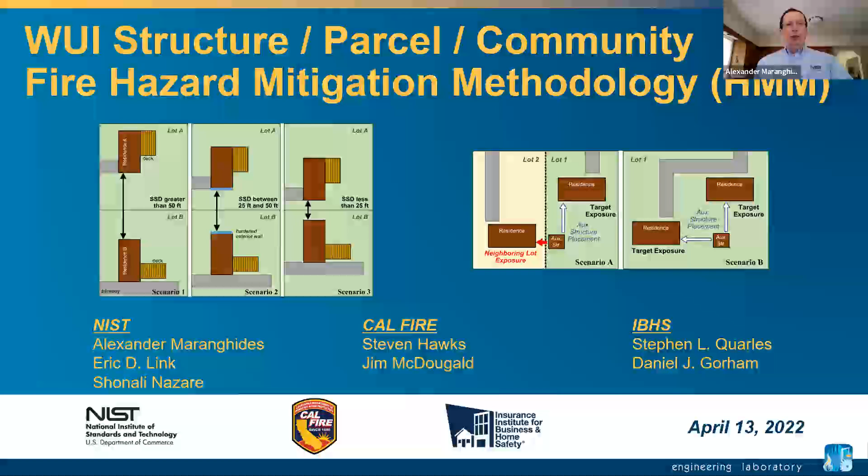So we're going to talk about structure separation distances and how we are using this concept to refine the WUI definitions at large, which are looking at the problem much more macroscopically at the national or even regional level. You're going to hear that fire and embers are very different, provide very different hazards, and how they're different spatially, temporally, and also what to do about them.

You're going to hear specifically that we're going to require hardening for embers, and that the fuel spacing is going to drive how much hardening will be necessary for fire.

Quick disclaimer: when we use the term 'required,' this is within quotes. Really, throughout this presentation, when we say must, require, shall, or should, this language is not code language. It is really to convey a point of critical technical importance that a specific action needs to be taken if we want to reduce ignition of structures and significant losses within the community.

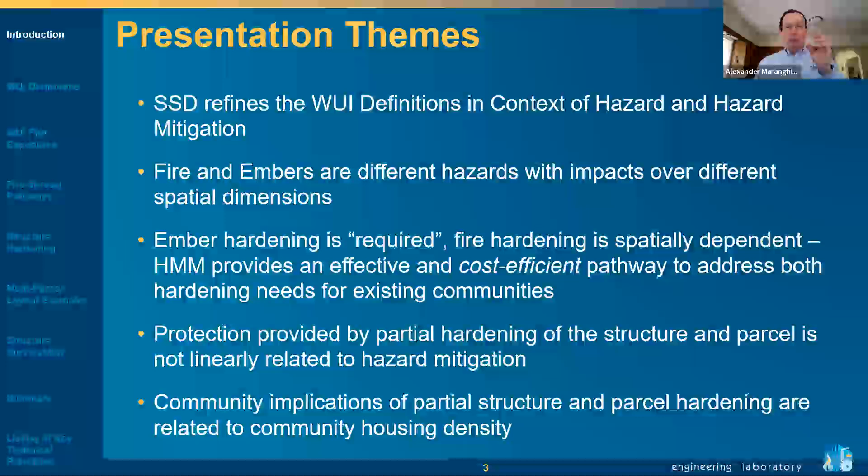So these are themes that I want you to keep in mind throughout the presentation. So let's talk now about hardening and hazard mitigation specifically.

When we look at hazard mitigation, we cannot think of hazard mitigation in the absence of exposure. It'd be like trying to build a building to resist a hurricane without knowing what wind intensity you want to design the building to withstand. It's exactly the same thing with fire and embers.

So when we're talking about hardening a structure, a parcel, or a community, we have to think of the hardening knob and also think of the exposure knob. And what we want is to get in the sweet spot — we want to reduce the exposure and harden the structure and get to the point where the structure doesn't ignite.

We don't want to over design, but that is obviously a safer approach. We certainly don't want to under design. So it's really the balance between those dials. We have to really understand this every time we talk about a mitigation at the parcel, and every time we talk about a mitigation at the structure, we have to be asking ourselves exactly what are we trying to defend against. This is really the driver, the technical driver that stitches this whole methodology together, this understanding of the hardening and the exposure.

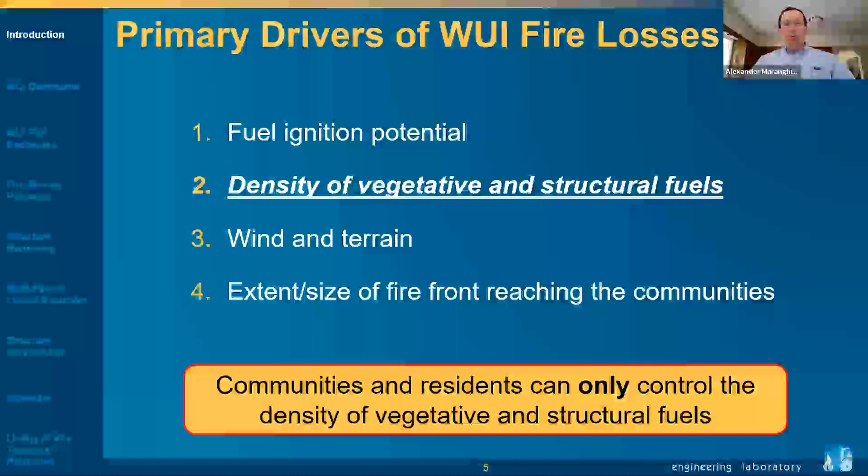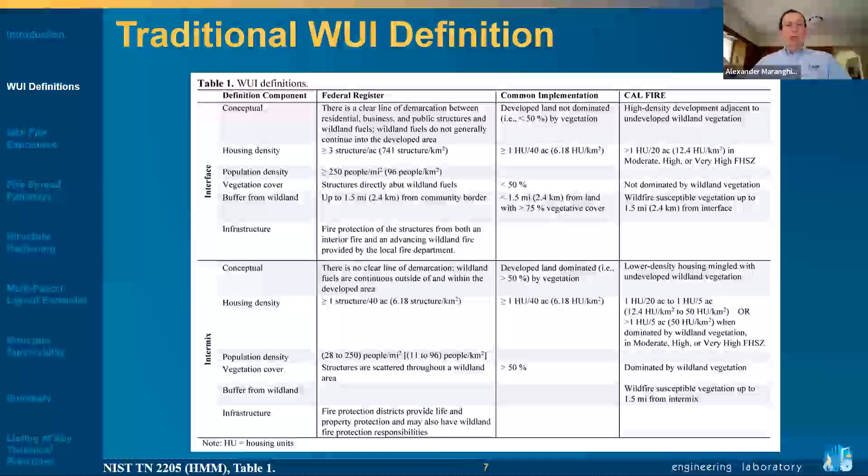I'm not going to dive into all of the details of the federal definition, common implementation, and specifically in California, how CAL FIRE has chosen to apply some of these federal register definitions. What I do want to say, though, is that these definitions were intended to provide a snapshot at the country level across the US, and added significant value to help us understand where WUI is.

There are significant limitations behind these definitions, and we'll talk about a couple of them right here. One is that it's quite coarse, and it's understandable that definitions are coarse because we are looking at landscape scales, using LANDFIRE data in many cases, coarse information. The second part is, by default, because we're defining it, we're constraining it, and what this does is it creates, in many cases, arbitrary lines where on one side of the street we are in WUI, and on the other side of the street we're not.

And that can cause problems, an example of which is the losses at Coffey Park in Santa Rosa, where that community is almost a mile, 0.9 miles away from the furthest reach of the WUI definitions. So we like to think of, as we move forward, large outdoor fire risk areas, not necessarily just WUI, because we are seeing that these definitions can really restrict our implementation, our decision-making process. So we wanted to use this as a baseline, but really expand.

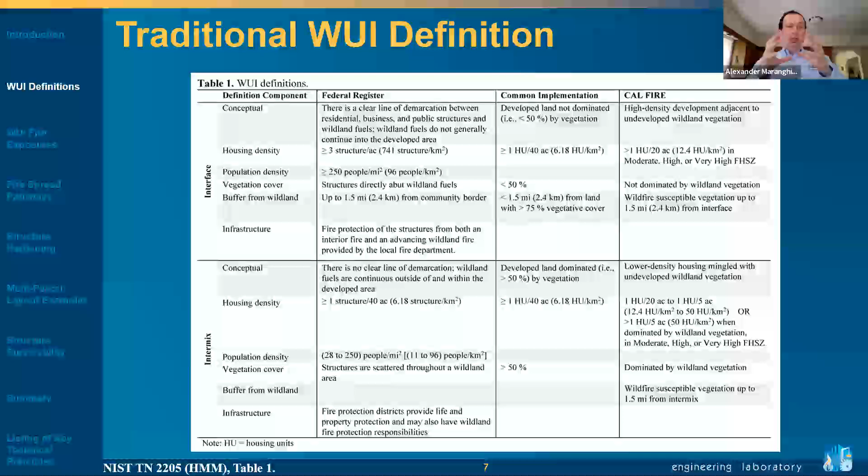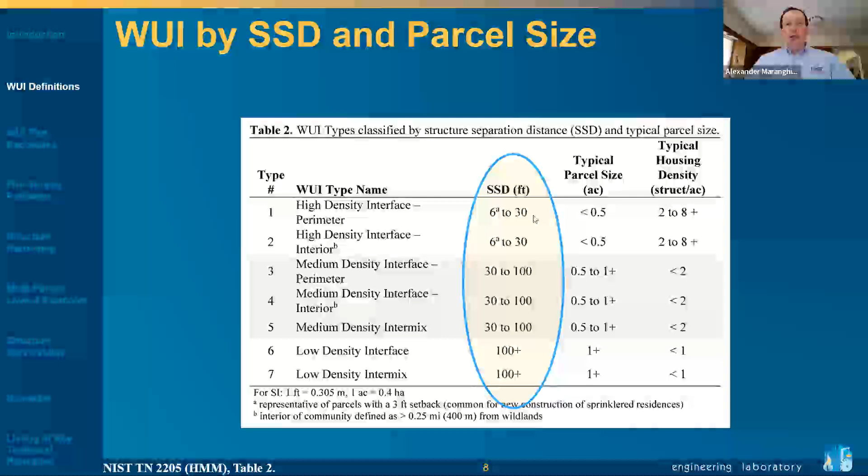So we wanted to introduce that concept and look at typical parcel size, and these are not absolutes. The SSDs, the binning of SSDs, definitely provide a high-level perspective. When we look at a community, we can say okay, we're in a type 1 or type 2 community, but that's not sufficient. We have to do the analysis at the structure and parcel level. Later in the presentation, you'll see why you cannot just use parcel size and why you cannot just use SSD. It's really the spatial layout at the parcel and within parcels that drives, or should drive, in the case of HMM, our mitigation strategy.

So this is an example of a type 2 WUI. Here we have SSD, structure separation distances, in type 2 between 6 and 30 feet.

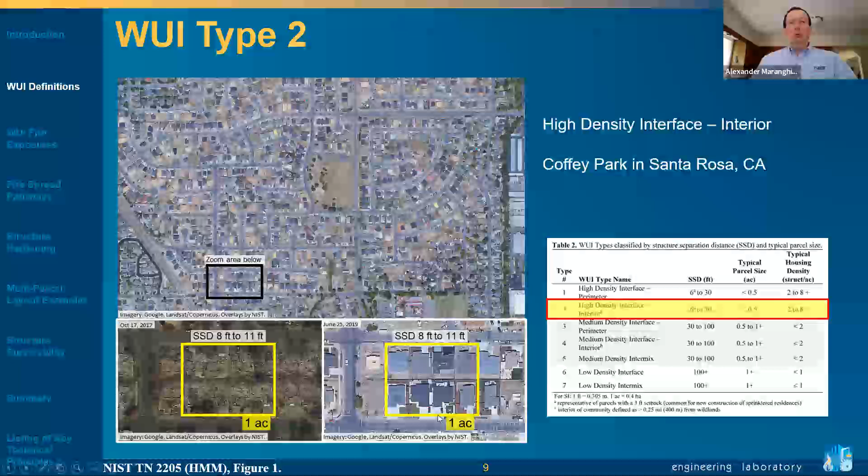If we look at Coffey Park here, this is post Tubbs, and this is pre. Right here, this is post and this is pre. We see SSDs of 8 feet to 11 feet, and we know the extent of devastation that occurred there. Just for scale, this is 1 acre, and we already see structures right there. So let's move along and look at some others.

Coffey Park is by no means an outlier, and California is by no means an outlier. We're seeing this type of structure separation distance, i.e. high density construction, all across the nation.

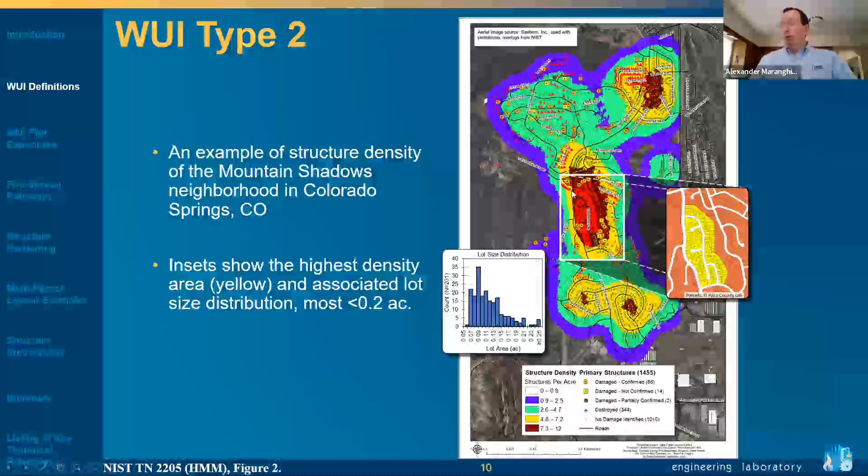This is an example from our Waldo Fire reconstruction in Colorado Springs. This is the Mountain Shadows neighborhood. Here you see these lots are nominally just a fraction under a tenth of an acre. The red indicates destruction, so very similar behavior as what we saw in Coffey Park. If we look at it a little bit more, here in less than an acre we have 1, 2, 3, 4, 5, 6, 7, 8. So it's even a little denser than what we just showed for Coffey Park.

If you look at the report, you can see the different structure separation distances and understand a little bit more about fire behavior in those different spacing regimes. But the sea of destruction here really tells us of the potential for very high losses in high density.

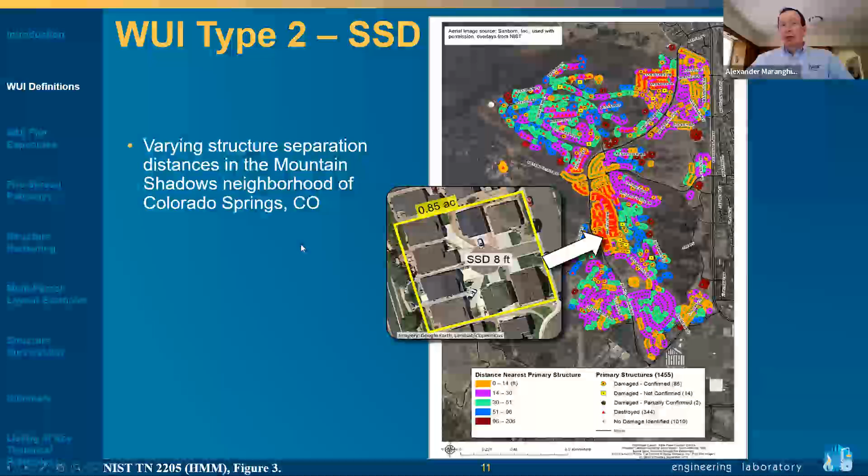Now, having said that, little spoiler alert here, you will see as we go forward that there is a path forward to really enhance the resiliency of those communities, and that's really one of the significant values added by HMM. So let's keep going here just to keep getting our bearings.

This is a type 6. This is in Rancho Santa Fe, near San Diego. Here you see significantly more room between structures. In some cases the structures are closer. We'll see this slide as well.

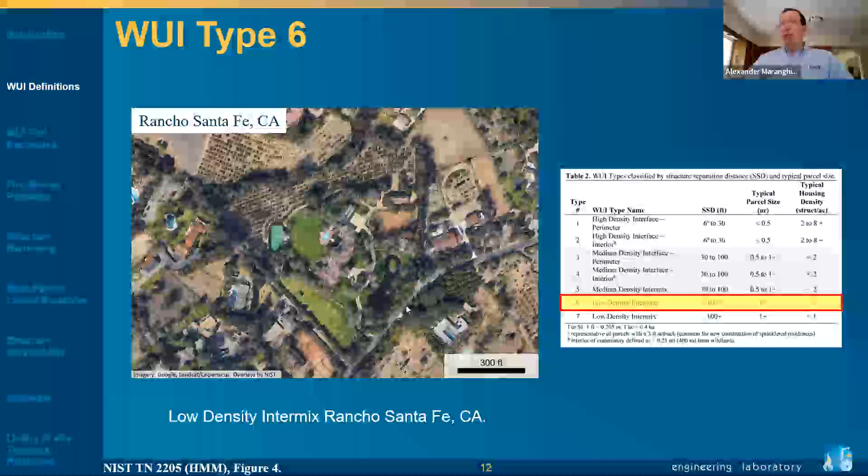So again, when we talk about a type of community, it's to provide perspective. The analysis has to be done at the structure level, and this is a clear example. This is the Trails community in Rancho Bernardo, from our Witch and Guejito fire reconstruction. Here we have two communities, or two community types: type 6 right here, and then type 5 on this side of the street with much closer structure separation distances. You could argue that even this right here could be interpreted as type 5 compared to the spacings.

A few things to point out here. When you look at these parcels, we're seeing irrigated lawns, extensive irrigated lawns, long paved driveways, i.e. non-combustible, pools, tennis courts. So in this situation there are a few areas with fuel, but I'm going to use that term loosely, landscape. Parcels are very well maintained, irrigated, trimmed, pruned, cleaned. There's a little bit of a section over here that is more of a wild habitat, and that extends in the ravine on the other side towards the valley.

So we have to keep focusing at the parcel level and understanding what we're really seeing, understanding what the structure is going to see in terms of exposures, and where these exposures are going to come from.

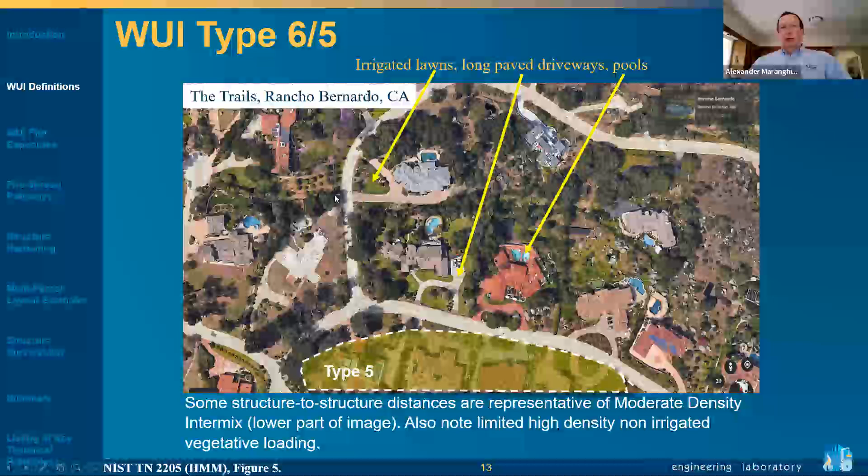Lastly, I want to show a type 7. This is low density intermix. This is Concow, and this is the zoomed in area over here, so you can see really the very low density. This imagery is taken post Camp Fire in both cases. All right, so here those structures are quite a ways apart.

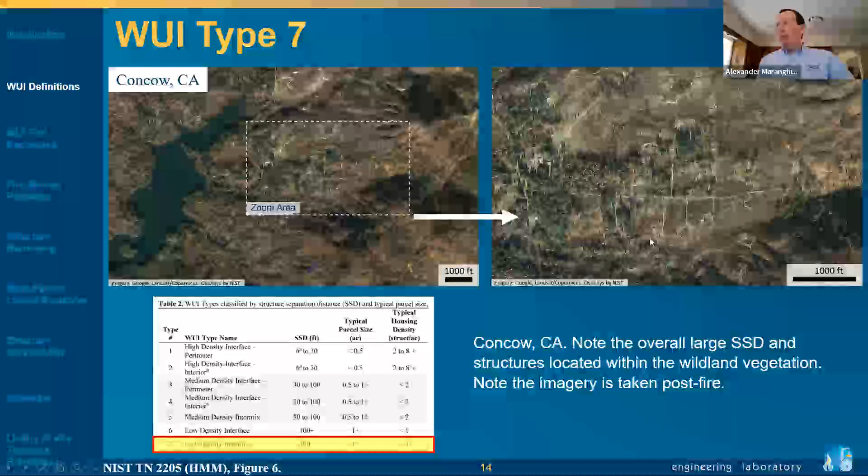And there was significant vegetation, and we can see the destruction here.

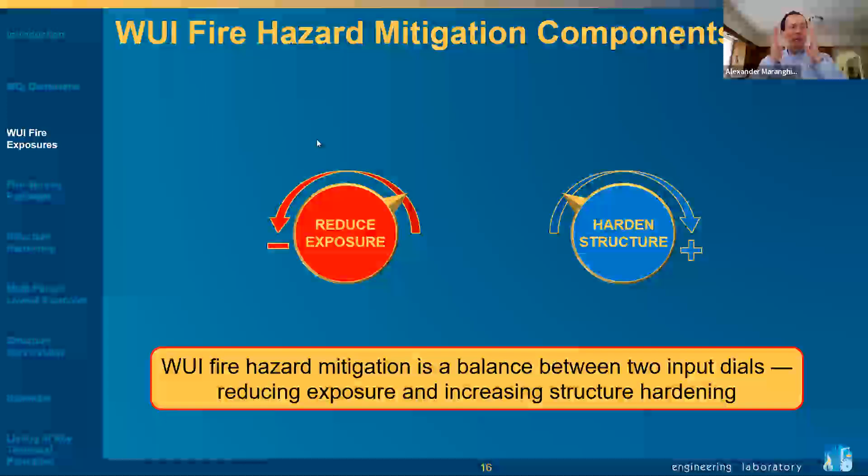All right, so let's now dive in and talk about fire and ember exposures. We mentioned this earlier, it's a balance, so let's understand a little bit more about the exposure. We're going to look at the red knob, take it apart, and look at fire and embers separately, because we have to address them separately. They're not the same thing at all.

So I'm going to start at the bottom here of the slide. We have a source here, and the source is generating fire and embers. Depending on the source, fire can be a problem intra or interparcel, depending on the intensity of the source, the location of the source within the parcel, and the sizes of the parcel.

But to bound the problem, fire is an issue we need to deal with anywhere from 0, meaning the fuel that is burning is right against the target, the residence we want to protect, nominally up to 100 feet. This upper end is not a hard number, but it provides context. In many cases within the community, we're talking about tens of feet of exposure that we have to deal with.

These fluxes can be over 100 kilowatts per meter square if you get in the flames. Durations, you can have a bush that flares up that lasts a few seconds, or you can have a structure that is burning that can burn for tens of minutes. So the exposure is quite variable.

In terms of critical ignition heat flux, we can think about 15 kilowatts per meter square. This is a rough number. Of course, it is a function of the flux, the duration, integrated with respect to what the residence or the particular material in the assembly can withstand. But at least this starts bounding the problem.

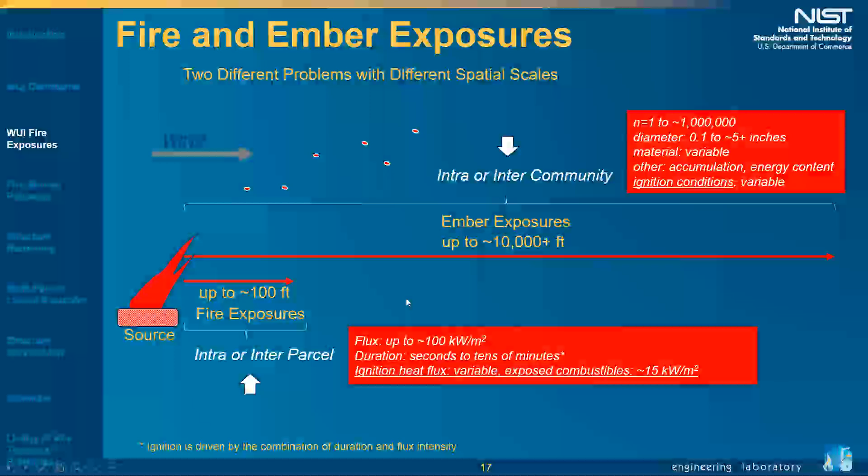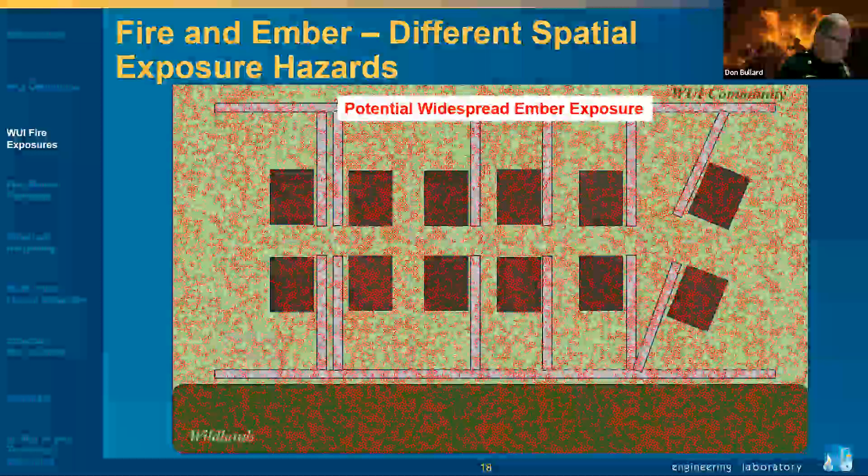Alex, can I just interrupt you for a second? I apologize - can you maybe turn off your video, because your internet is cutting in and out? Maybe if you turn off your video that might help. Perfect, I just stopped the camera. Let's see if this is any better. How is this, can you hear me okay? So far, yes, seems to be better. Okay, now... all right, yeah, okay. Thank you, Denise. So do I need to go back, or did you guys catch most of it so far? I think we're okay, Alex.

All right, okay. So this is a scenario here where the fire comes, in this case, from the wildlands at the bottom of the screen, and the community gets initially impacted by embers. There's a little animation to show how things tie together and how the fire starts progressing within the community.

So the embers come in, the front arrives, and once you have a structure ignition, now locally you have significantly higher fire exposures and a new source term for ember generation.

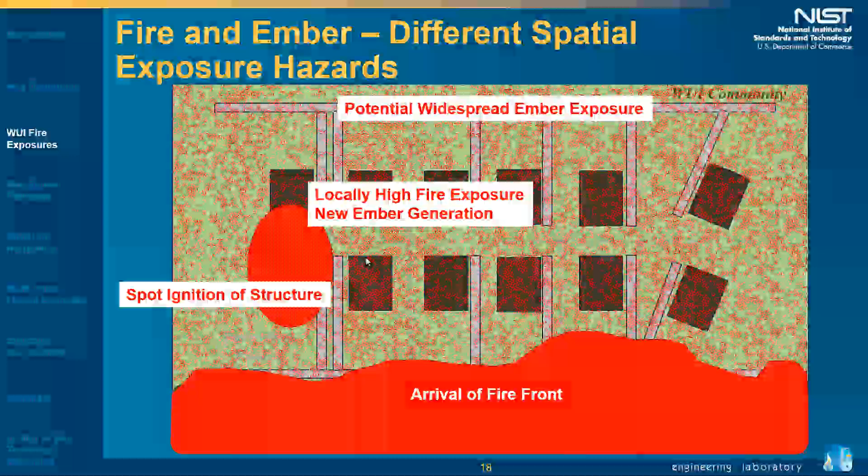You can think of it as dominoes falling, and we really want to manage those ignitions, ideally stop them. But the impact of those ignitions is going to really be a function of the community density and the structure separation density. One structure ignition in high density does not have the same impact on the community as one ignition in a community that has 2-acre lots.

Let's look at structure ignition pathways, because at the end of the day this is really what's causing the ignition. Here we have a list of, just as an example, 5 different vulnerabilities. There are many, as you know, and as we'll see in the tables that follow. Here we have fuels within the community, on the same parcel and surrounding parcels, and here the wildland fuels. In white are materials that we have already done some research on.

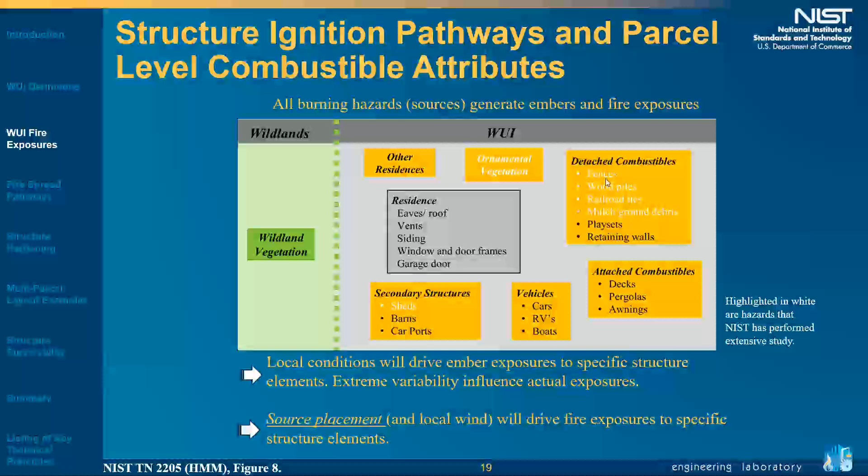So I want to look at a specific situation. As I mentioned earlier, the flames, the fire—when we talk fire, it's convection and radiation—are really driven by the spacing. The embers are going to go places. Exactly how far they go is very variable. We can have no control of that, so we're not going to focus on any of that here.

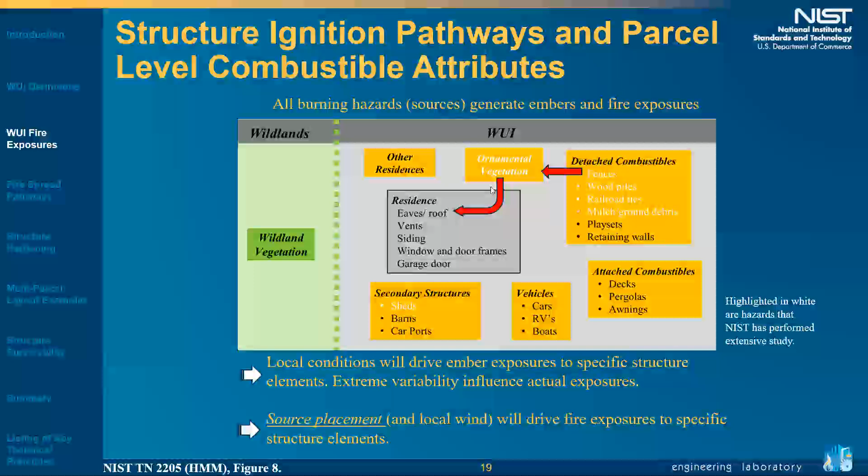So let's look at a specific scenario, from the Camp Fire. We have multiple fire ignition pathways that you can study in this technical note 2135, the Camp Fire progression timeline report. Here we have a fence to ornamental vegetation to residence, and this is the progression: combustible fence, tree, eaves, structure destroyed.

The one point I want to make here, which you will see in an example in a few slides: this residence—the owner had placed a chain link fence on their property, probably 5 to 6 feet away from their residence. So they had done what they could do. It's unclear where this tree belongs, whether on this property or that property. But the point is, these pathways really bring fire to the house, the residence, or the structure of interest, and we need to uncouple them.

And we have to think of the exposure and the hardening to make sure we get to the uncoupling. And the other point is, just from this snapshot in time, you can see the ember generation occurring, getting going over here. We have plenty of reports out there, literally of millions of embers moving through a community. This is not new. We need to deal with both of those things.

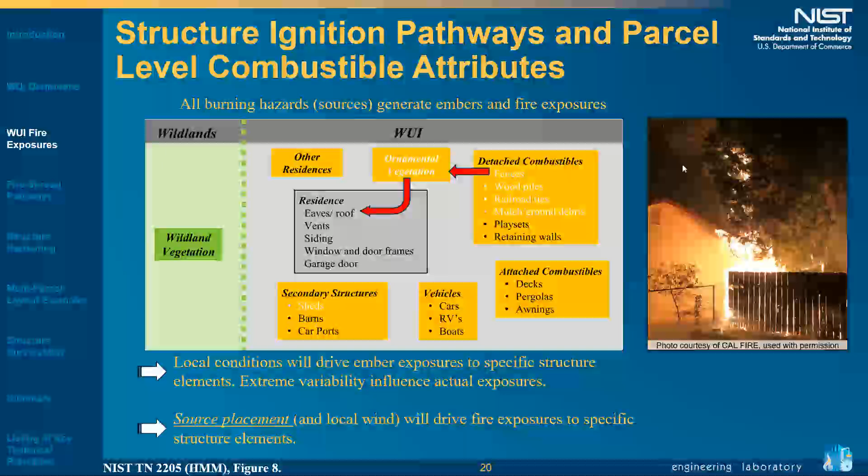So let's go to fire pathways and expand now to look at structure and parcels. There are 3 different scenarios I want us to look at. Number 1: codes are typically parcel centric, and there is very little information that relates the hazards from parcel to parcel. There is some information on primary residences, and very limited information on auxiliary structures. This has significant negative impacts on the problem at hand.

So we need to acknowledge it, understand it, and then leverage it to improve our community resilience. Number 2: linear features can carry fire very efficiently within and between parcels, and you're going to see a number of scenarios. Fuel agglomeration has significant impact on the energy release. We use the term agglomeration specifically and intentionally—this is a new term in the context of WUI. We are not thinking of fuel loading the way we use fuel loading as an average across, let's say, a commercial structure.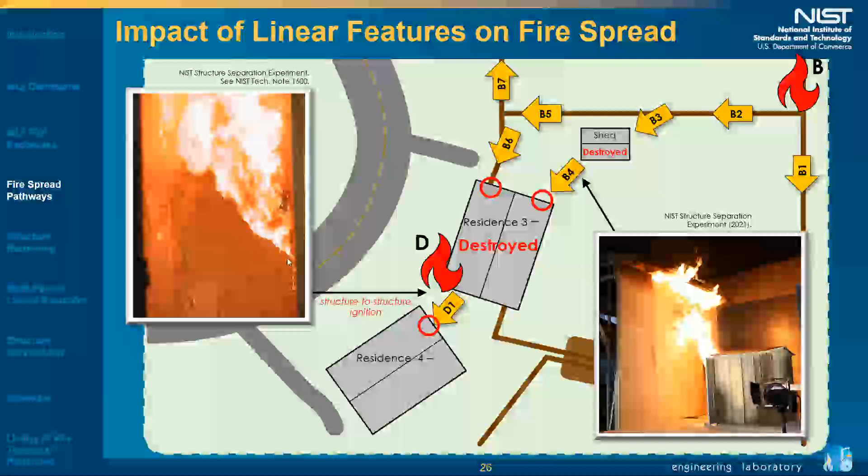This is our NIST technical note 1600, where we set 2 structures 6 feet apart. And we didn't ignite the full house on the right; we just ignited the living room. The fire came out the window, and within 80 seconds the neighboring structure was on fire.

So you can appreciate the complexities and challenges of these linear features, particularly because they're connected. They're connected between parcels, and they're acting truly as wicks, carrying fire throughout the communities. And we have seen this across the nation.

We've seen it all the way back to the Witch fire. We've seen it in Texas with the Amarillo and the Tanglewood complex fire. We saw it in Waldo, and we saw it in Camp as well. So this is a really big issue. We have to be very mindful of that, particularly in high density communities.

So let's talk about fuel agglomeration, and then we're going to look at a couple of things here. This is from the fence report that's going to be coming out. So this is what a single fence looks like, and this is what a double fence looks like. And there are a lot of double fences out there. You put up a fence, and your neighbor doesn't like your fence, so they put up another fence.

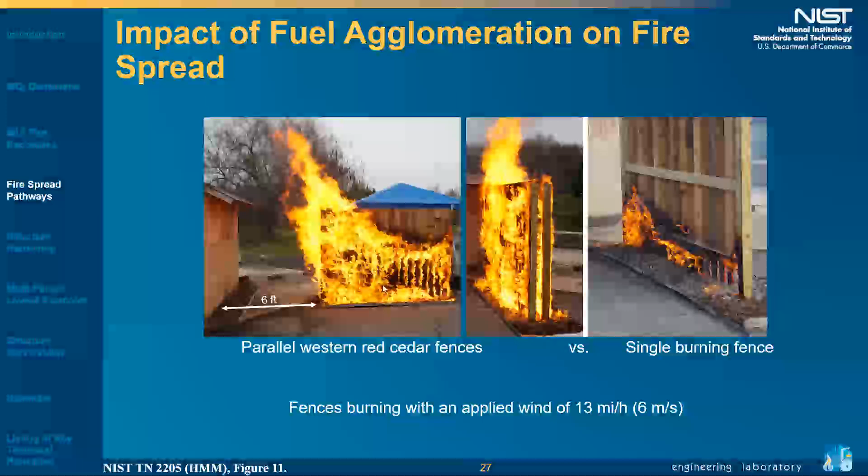And now this fuel agglomeration disproportionately increases the energy release, therefore the exposure. So this has, again, a very significant impact at the parcel level. And as you read in the report, we spaced those fences by 6 plus feet, and we're still seeing effects. So this type of local fuel agglomeration really has very dangerous, potentially dangerous repercussions throughout the community.

So let's look now at spatial relationships between fuels on two adjacent parcels. Let's go through lot A and lot B real quick. We have two residences, they each have a deck. On this parcel, lot A, there are two sheds, A1 and A2. On lot B, we have a smaller shed similar to A2, and then we have a gazebo.

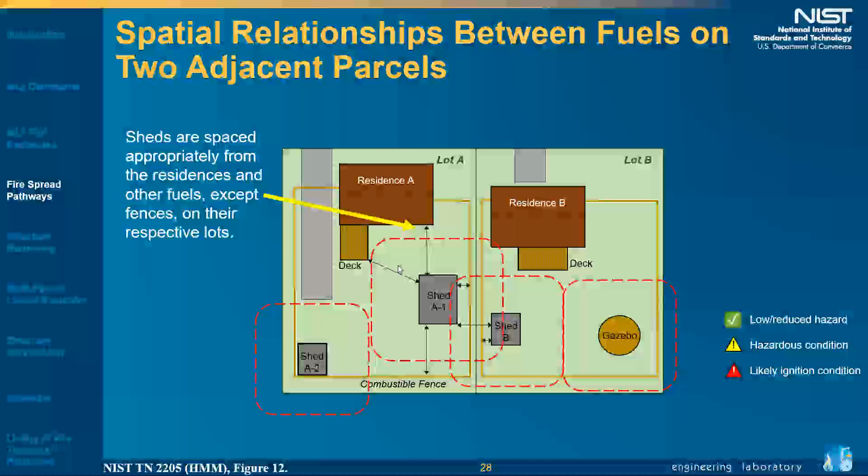This shed is appropriately spaced from this residence, and this shed is appropriately spaced from this residence. However, we have a number of issues. This gazebo is close to the combustible fence, same with this shed on this side.

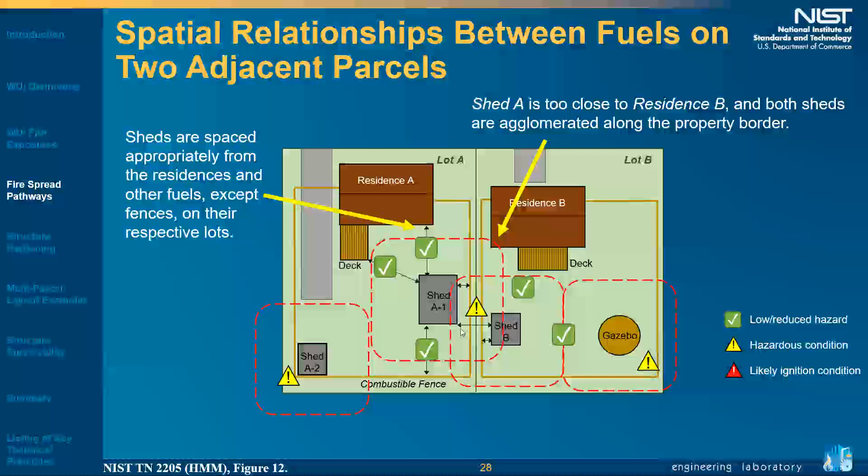And then we have this issue of fuel agglomeration. What happens is shed 1 from lot A in this figure is too close to residence B. So that's a problem. But also we have this significant agglomeration between those two sheds and the parallel fence here.

And this substantially increases the exposures, which then impacts residence B. This is an illustration of the challenges of the spatial location and interactions, not only within a parcel but across parcels. And that all leads to: go do analysis, find out where you're going to put your fuels, and in some cases where you cannot have fuels because of limited space.

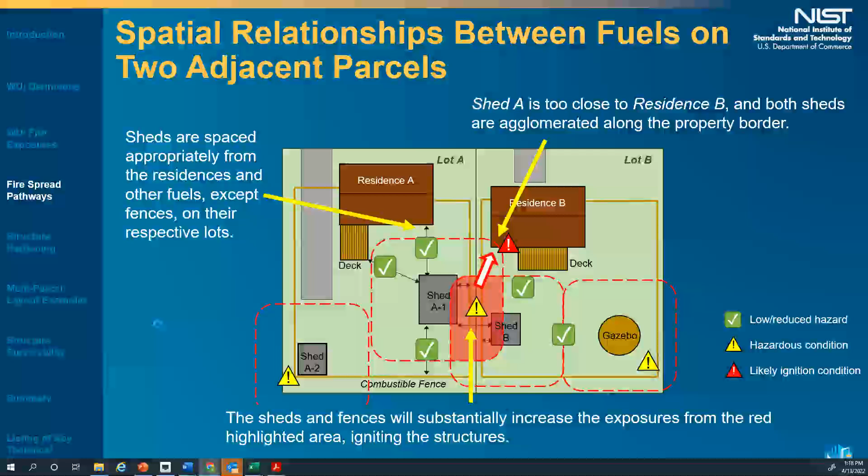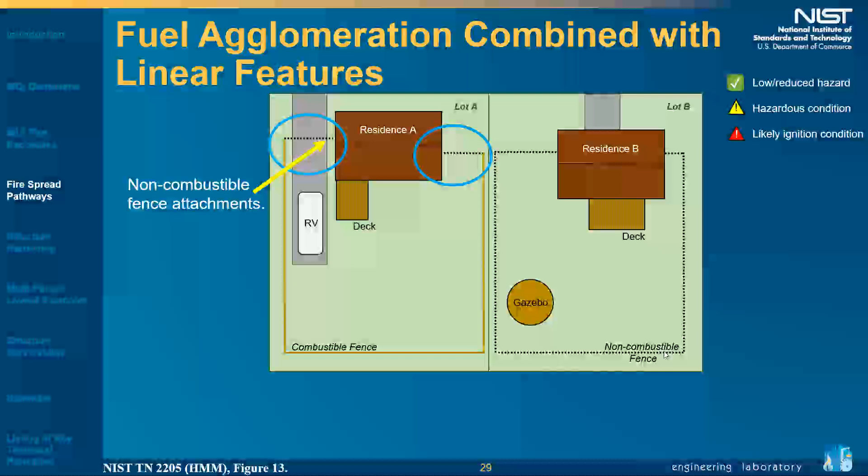So let's look at now another fuel agglomeration issue combined with linear features. Here we have taken the fences away from residence A, which is something we encourage people to do, but let's see if this is sufficient. Also on lot B, residence B has chosen to put a non-combustible fence, a chain link fence.

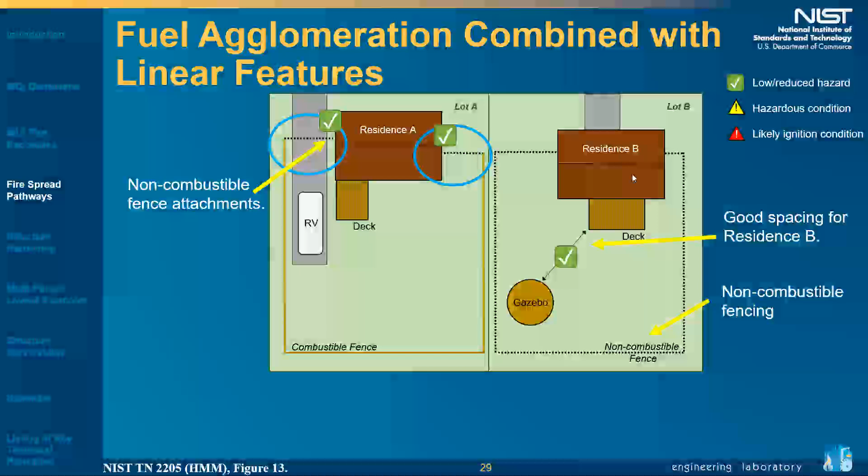So initially this looks pretty sparse. You think that we're okay. Well, let's see how this plays out. Things are good here, and the gazebo is good. Gazebo to non-combustible fence is good. But if we look at the gazebo to the fence, that now can bring fire straight to residence A.

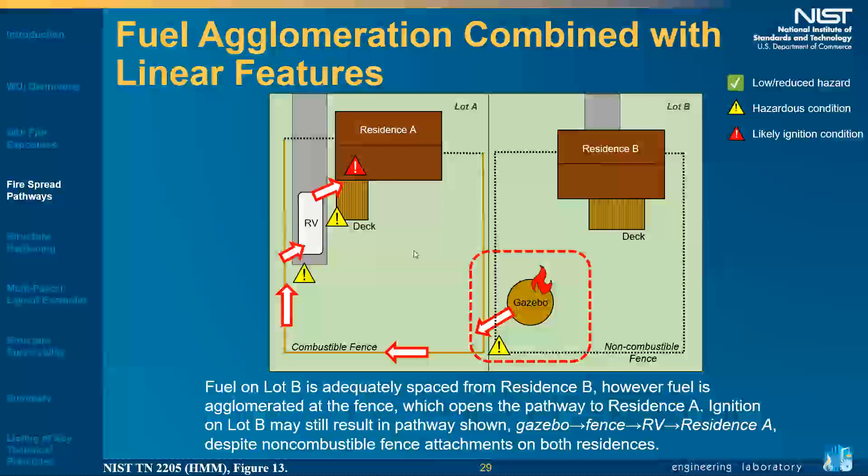And these are the types of pathways and behaviors that we're seeing over and over out there. So gazebo to neighboring fence to RV to structure.

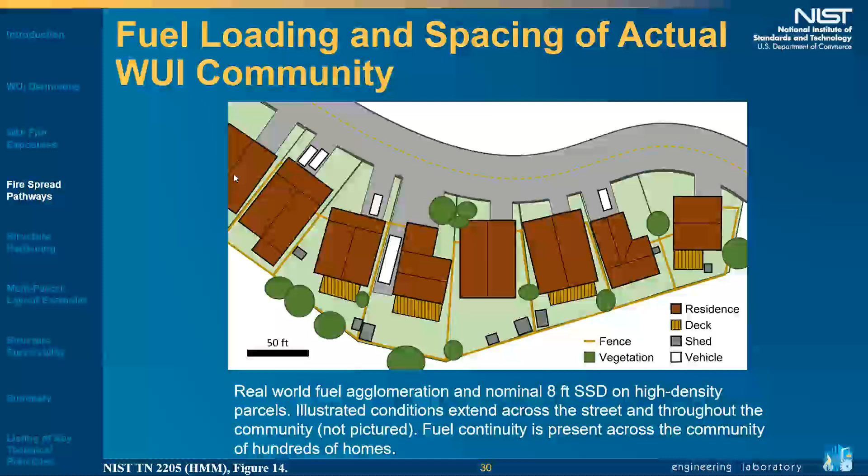This is a digitized snapshot from an actual community. You can see we haven't put mulch beds on this, we haven't put a lot of the smaller fuel present. But you can see that the scenarios illustrated in the previous slides are very real, and in many cases don't even capture the challenges of very high density as illustrated by this figure, where SSDs are as little as 8 feet in this figure.

So now let's look at structure hardening. Let's dive in and specifically look at what we need to do.

So embers are uncontrollable, we talked about that. Unpredictable, they can come from your neighboring lot or two lots down. With the exception of managing the ignition, the fuel loading and the ignition of fuels within our parcels, we have very little control of embers. In reality, managing the fuels at our parcel should be done primarily for fire, because that has the local impact. The embers, even if you manage yours, you could literally get a sea of embers from your neighboring parcel. So we cannot assume we're going to have low exposures.

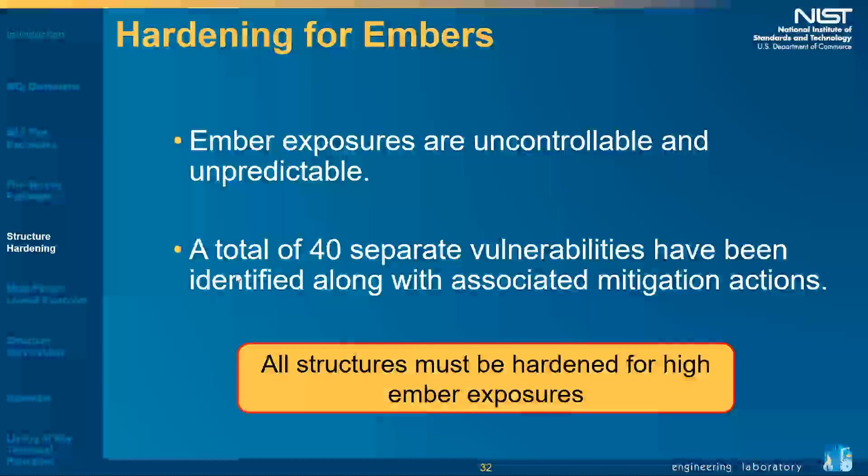We have to assume we're going to have high exposures. We have identified 40 separate vulnerabilities, and if you identify more, please expand and add them to the use of HMM. The bottom line is we need to plan to harden for embers, and we have to assume we're going to have high exposures, which means we have to deal with all the ember vulnerabilities. We cannot pick and choose.

Let's talk about fire, hardening for fire. Right off the bat, I want to say hardening the building is the last resort, okay? Reduce, relocate, remove—those are the 3 R's of hardening before we get to the structure. So reduce fuels, let's give an example: firewood pile. Well, have less firewood on your property, that's going to mean less energy release when it catches, and that'll help with fire or flame exposures.

Relocate—we've been talking to folks about moving their firewood pile away, but as we saw in previous slides, and as we'll see again, there are limitations, because you don't want to think of this as a parcel-centric approach. This is a parcel analysis, but based on exposures which come from other parcels. So it's a community approach. Remove the fuel—this is by far the best solution.

When you have gone through the 3 R's, only then should we consider hardening. And hardening is done in HMM directionally, so you want to deal with where the exposures are, and it's only recommended in specific scenarios where it'll add value. There are many scenarios where it will not add value, and we are saying don't expend valuable resources hardening in a situation where the exposure is so high you won't be able to really add significant value.

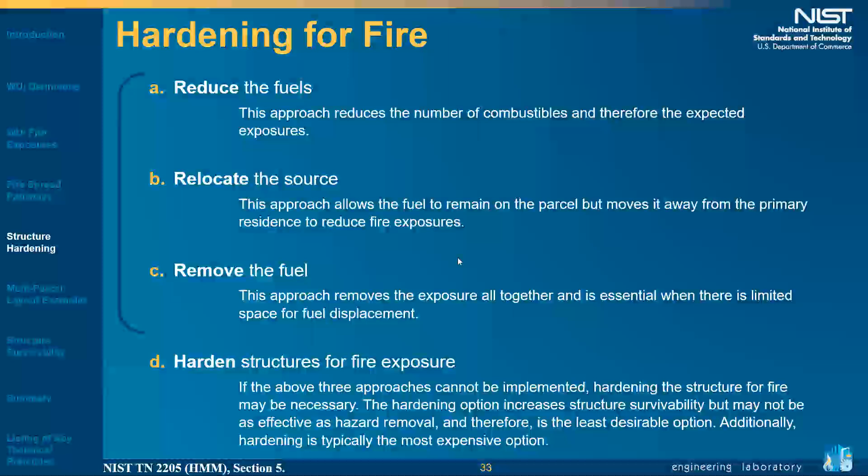So hardening, we need to deal with understanding the relationship, but before we go and start changing the cladding of buildings: reduce, relocate, remove. That's why these things are grouped in the way they are. This is a very dense slide, and I encourage you to go and study it.

But the main point I want to make here is that structure separation distance, and the way we have redefined WUI including structure separation distance, has significant implications on how the community is going to respond to a single structure ignition.

So if we look at potential fire exposure from a burning neighboring structure, this is high. Probability of structure survivability if a neighboring structure ignites, low. Impact of structure ignition on fire spread in the community, high. Likely effectiveness of partial structure or parcel hardening, low. What this means in a nutshell is, in high density, we have to keep fire out.

We cannot keep embers out, but we really have to keep fire out. We have to harden for embers, and we have to keep fire out, because once that fire gets started it's very hard to manage. Because of the density of the fuel agglomeration, in cases where we have winds of 12 to 15 miles an hour and above -- this is not a hard number, but for perspective -- we can physically not extract, we cannot remove the energy fast enough to prevent that spread.

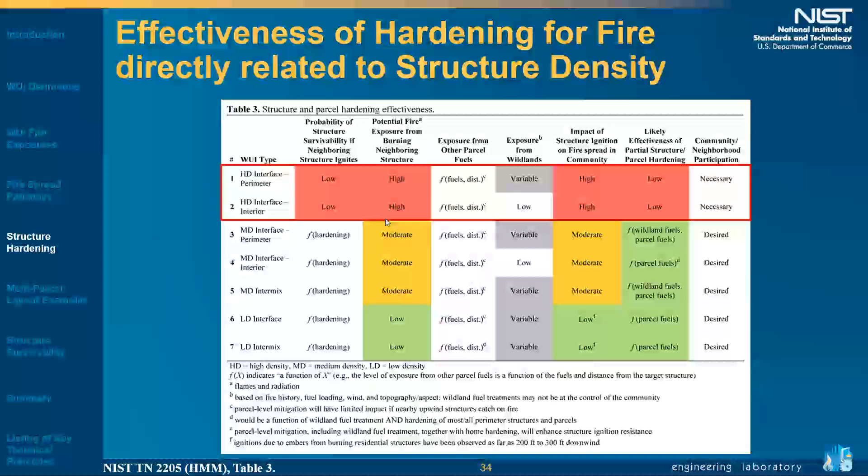So if we look at implementing HMM, we're moving right along here. We're going to harden for embers always, and we cannot pick and choose -- we'll look at that in a little bit more detail. And then we're going to look at tables B, C, and D to look at the flames and hardening for fire. That's going to be a function of fuels, a source term, energy release size, and spacing.

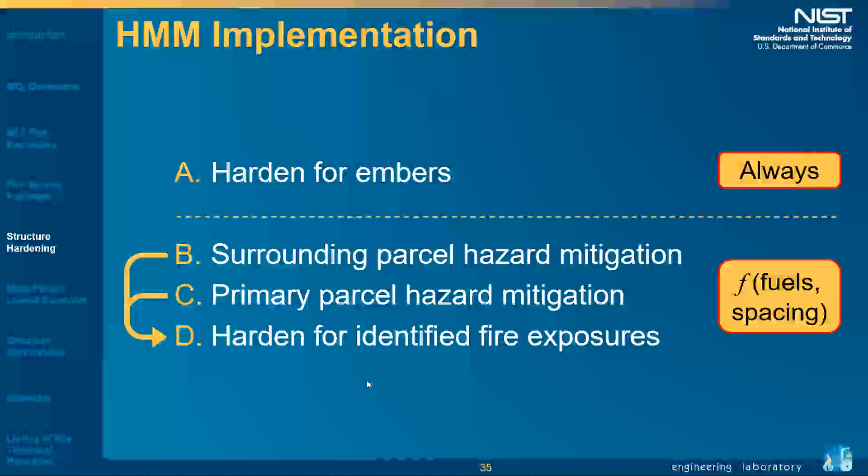So we're going to work from outside in: surrounding parcels, then primary parcel, then tables B and C tell us when we need to go to D and harden, and what needs to be hardened in D for fire hardening at the structure level. So let me move here.

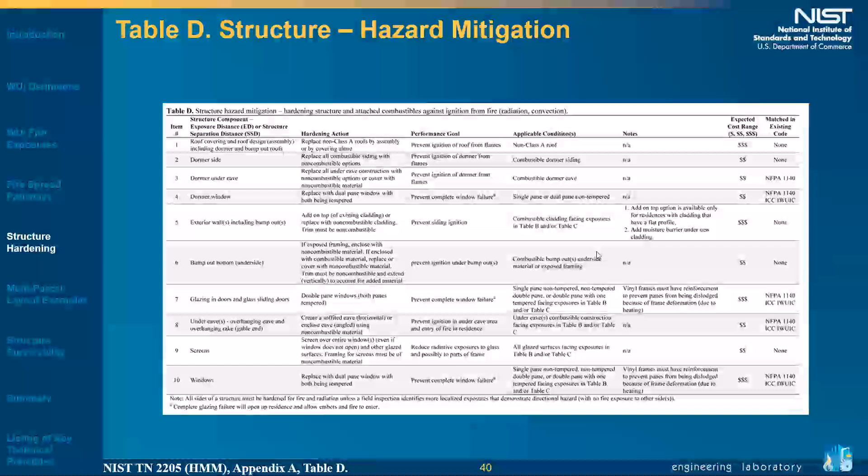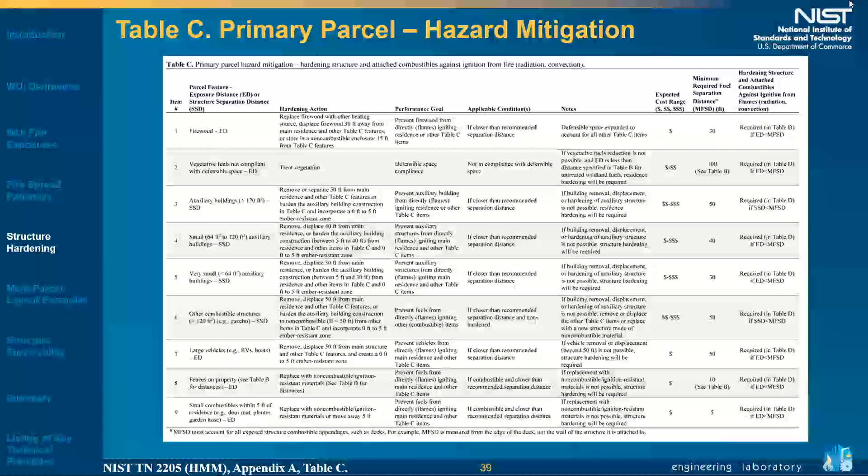So let's look at this notion of... I'm going to go back here one slide, and one more. Oops, sorry - a little apology for the jumping around. My mouse is misbehaving, how am I going to do this again? Let's go and look at this fuel separation range.

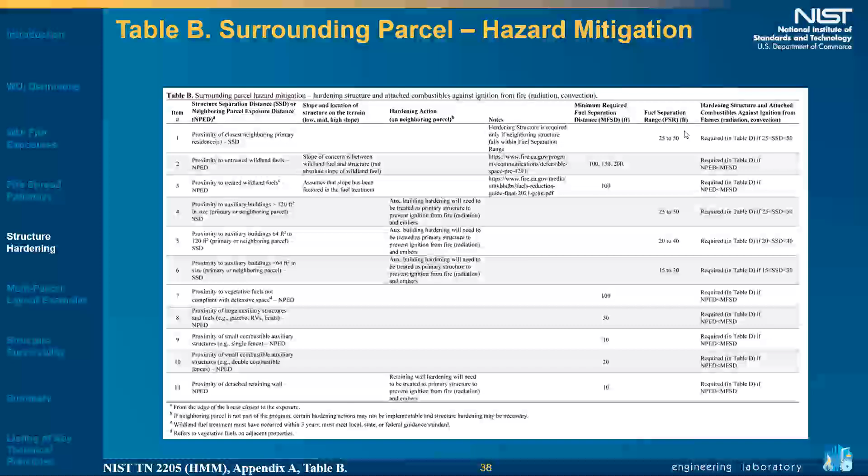Let's say 25 to 50 right here, and see how it plays out. This is now figure 15 in the report. We have flipped the figure around, so we're going to start with scenario 3 and work our way to scenario 1 for clarity.

Here we have a situation where we have an auxiliary structure very close to the residence. We can move this structure some distance away to meet the requirements in tables B and C. In this case, we are in what we'll call the sweet spot, where the exposures are not as severe as in scenario 3, but there are still concerns about exposure. The path forward here is to directionally harden these two sides of the building.

But remember the 3 R's - so before we jump into hardening, we want to explore what other relocation options we have. If we move this structure and we have the room on the parcel, and we move it far enough, now we're okay. However, big however - remember that this is a community approach.

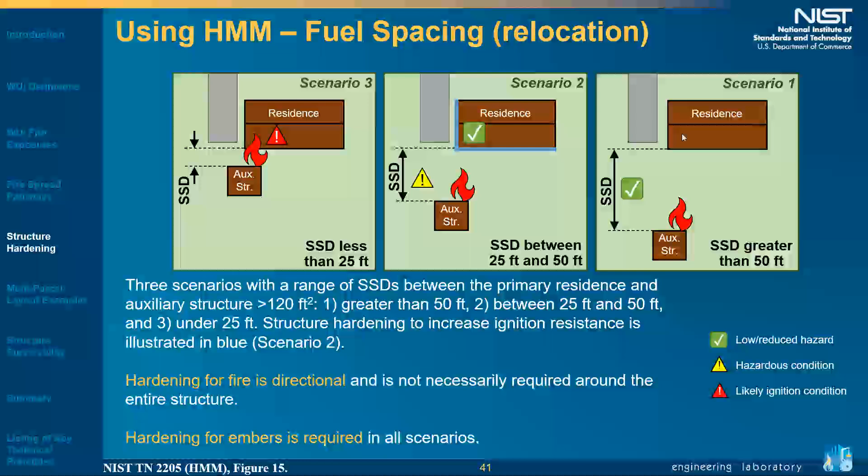So we don't want to take our hazards and move them away from our residence and cause problems for the neighbors, and this is exactly the situation we would have here. So fuel relocation must consider neighboring parcels. We saw this idea earlier in the presentation. So reduce, relocate, remove, then harden, but look at it not only in the context of your own parcel, or the parcel being assessed, but also the surrounding parcels as well.

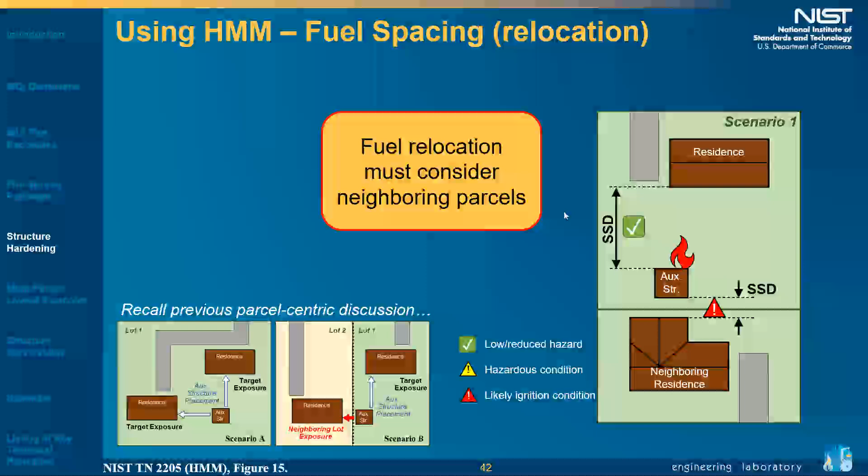When we are in the situation where we talk about 25 to 50 feet, now we are concerned, but we can harden. This is a scenario where the hardening in many cases will add significant value. And remember, we wanted to provide an implementable path forward.

This range is based on field observations and experiments, and additional experiments are happening as part of a multi-agency collaboration with CAL FIRE, IBHS, CBIA, US Fire Administration, and WUI Code, where we're going to be looking at auxiliary dwelling units and then ultimately some single residence experiments to better understand this range. But here we're looking at a spacing of 25 to 50.

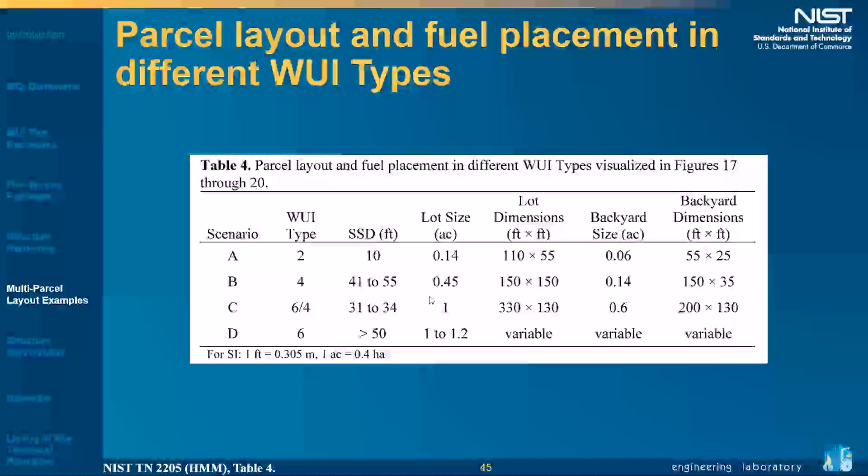So I want to move ahead here. I'm going to go through this section pretty quickly. We have four scenarios I want to look at, and here we have different lot sizes. As we talked at the beginning, we added structure separation distances in the WUI definitions, but really you want to look at this at the parcel level and do the analysis there. So we have a scenario here.

We have Type 2 WUI. If you look, SSD is 10 feet. We have a shed here. This shed is appropriately spaced with respect to this structure, but not with respect to the neighbor. We're not even talking about the potential fuel agglomeration if this is a combustible fence. So in small lots, it's very difficult to add extra fuel and not cause problems. Unfortunately, that's the reality because of the different pathways.

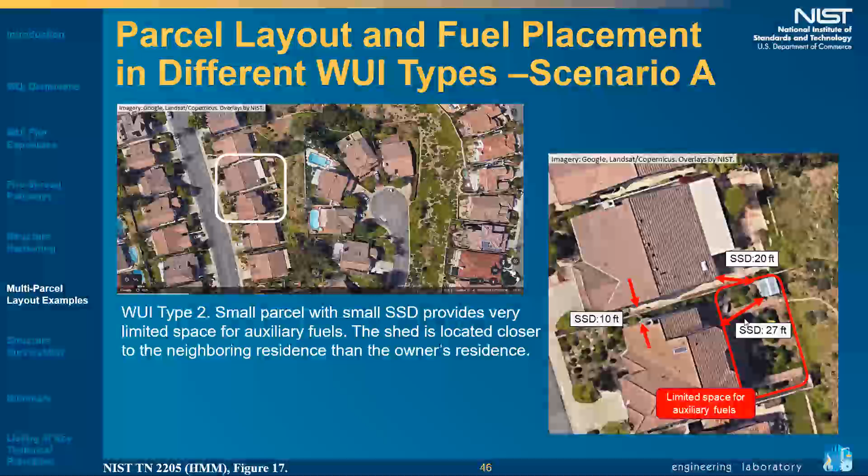If we look at WUI Type 4, this is definitely looking at larger lots. So here there are a couple of areas where fuels would be problematic because of the spacing, because of the locations. But there is an area here far enough from these structures where auxiliary fuels could be placed with limited impact on these buildings.

On the bottom here, what we see is in Paradise. This was impacted by the Camp Fire. On the left here we see pre-camp imagery, which is what happened here, or what is depicted above, and on the right is post-fire. This is the fire scenario. This shed right here ignited. This is all from first responder observations.

We spent 6 months in the field collecting data and talking with first responders and other people that were involved in the camp to pull all this together. This shed ignites, it ignites this fence, the fence ignites the neighboring shed, which ignites and destroys this building, and in the process injures a firefighter.

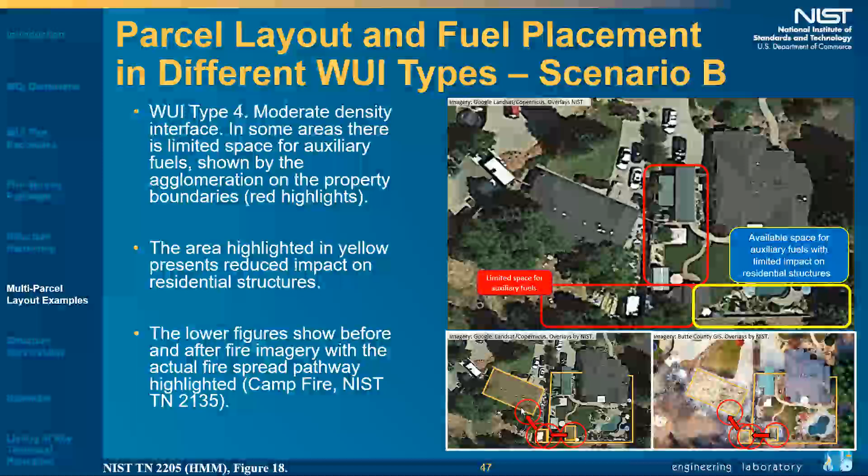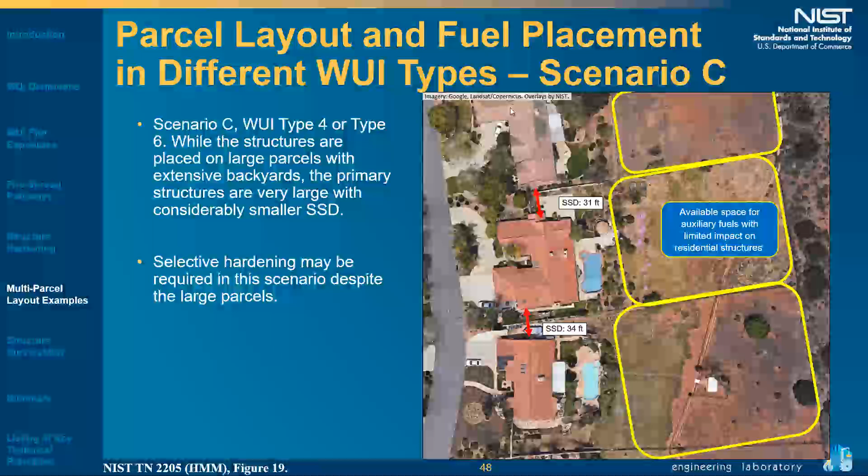As the lots get bigger, more options are available. This is another nice example of WUI Type 4. These are large lots, but locally we have a lot of fuels pushed towards the road, and you see structure separation distances that could require some hardening. But there are places on these lots, and this is a great example of a shed here, where fuels can be placed with limited impact on the primary structures. And then one more over here.

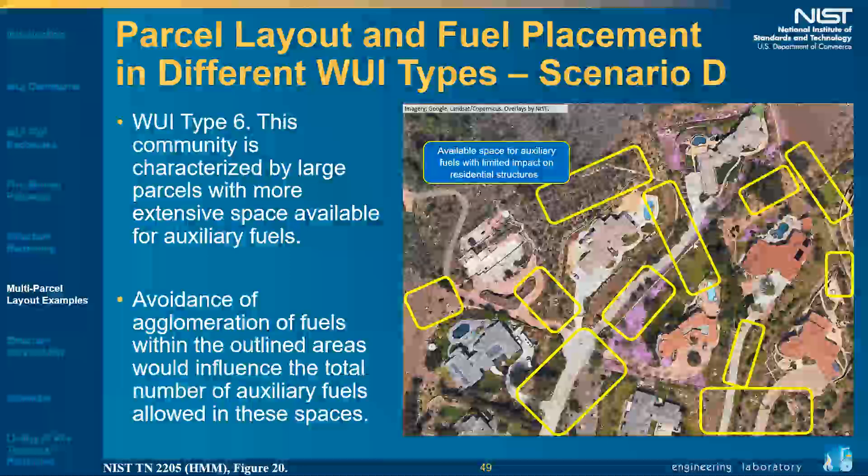And then we'll move to a structure survivability section and summarize. So here, this is Rancho Bernardo, impacted by the Witch and Guejito fires at the Trails community. These are large structures, pardon me, on large lots, and there are areas where we can put fuels. But we have to be mindful, again, within those areas, to limit fuel agglomeration and to really lay this out so we don't end up in a situation where we create either a dangerous pathway or locally very high exposures.

So let's talk about structure survivability.

We're going to talk about defensive actions, the effect of partial structure hardening, partial community hardening, and structure density before we wrap it up.

Defensive actions have significant effect on structural survivability in WUI fires. We have documented this all the way back to the Witch, Tanglewood, and Waldo fires. On average, over 90% of the time, we can tell you the name of the firefighter that saved the damaged structure. So if it is damaged, more than likely, it is defended.

But we don't stop there. In Waldo, we showed that 39% of undamaged structures within the fire perimeter were defended. So this has very significant implications, because what it really means are two things.

First, post-fire, we are seeing the effect of defensive actions on structure survivability. So first responders save structures, many structures, which is wonderful, and they're very effective and efficient in doing so.

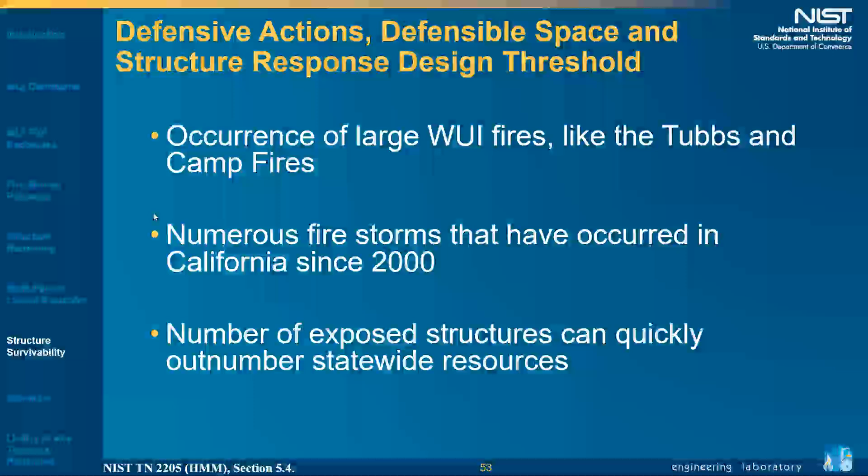So there is a very big difference between utilizing defensible space and using that as the anchor for our codes and standards, saying we want to make a structure/parcel defensible - that's one approach - versus, we cannot count on first responders, so we have to make a home standalone. We feel that based on the size of the events and the frequency of firestorms, we should aim for making structures standalone. And that is a significant paradigm shift in how we've been thinking about parcel hardening and structure hardening.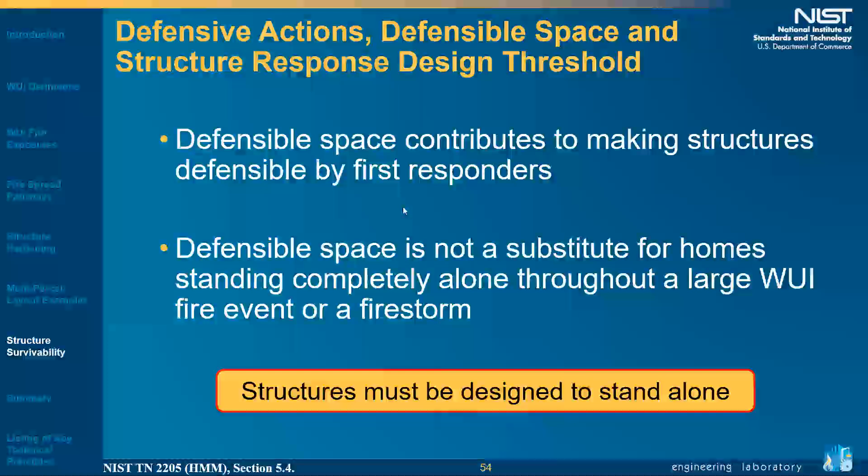So hardening for 50% of embers does not give you 50% ignition resistance, and hardening for 50% of fire does not give you 50% protection. It does not work, unfortunately, like that at all.

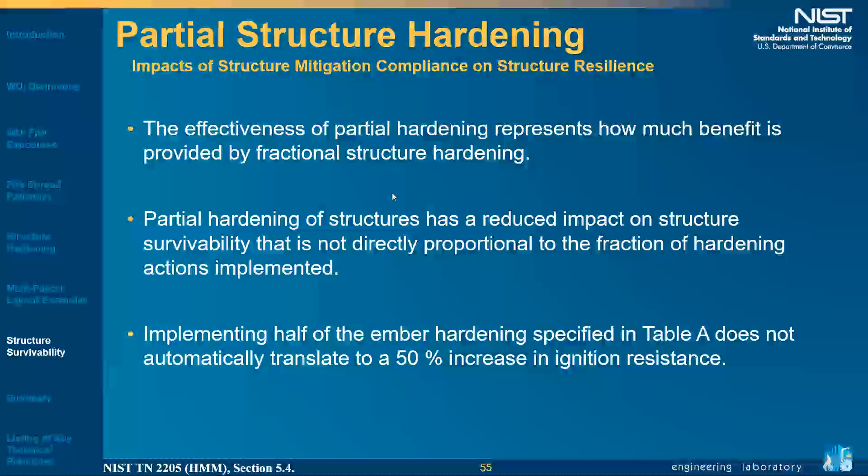Particularly when you look at the building as a standalone and acknowledge that you cannot count on first responders being there, which is the exact opposite of the way we've been thinking about and dealing with fire problems inside buildings. The first responders are part of our strategy, and residents in most places know that if there is a fire, they'll pick up the phone, dial 911, and there'll be an engine that deals with the problem. This doesn't work like that in WUI events or large outdoor fire events.

So we don't have the option to choose to partially harden and expect a significant reduction in ignitions and losses. So we put the statement together, and I'm going to go through it and show you the different components. Effectiveness of partial hardening is inversely proportional to local fire - that is the flames, radiation, convection, ember exposures, incident size, and number of simultaneous incidents. These two at the bottom really tie to the availability of defensive actions.

Fire has two parts: what may come from outside our parcel, which we typically don't control—hopefully the HMM is implemented at community level to manage that—and the significant control the resident has over exposures within the parcel. We're talking about reduction, relocation, removal, and ultimately hardening. Dealing with this at the parcel level can work in low density and somewhat in moderate density, but in high density we have to look at the community as a whole.

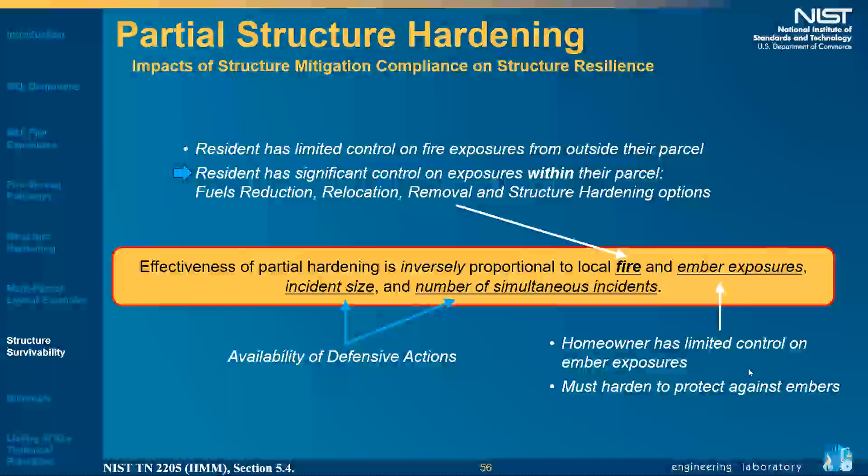We already talked about embers. We have no control over them, so we must harden. Looking at partial community hardening: one structure ignition in high density leads to large losses. In moderate density, it really varies on local specifics between fuels at the parcel and within parcels. In low density, losses will be driven largely by embers and ember hardening, but you can clearly see the relationships.

So the message here is, if we want to aim for partial hardening, we need to space things further apart to compensate for those ignitions.

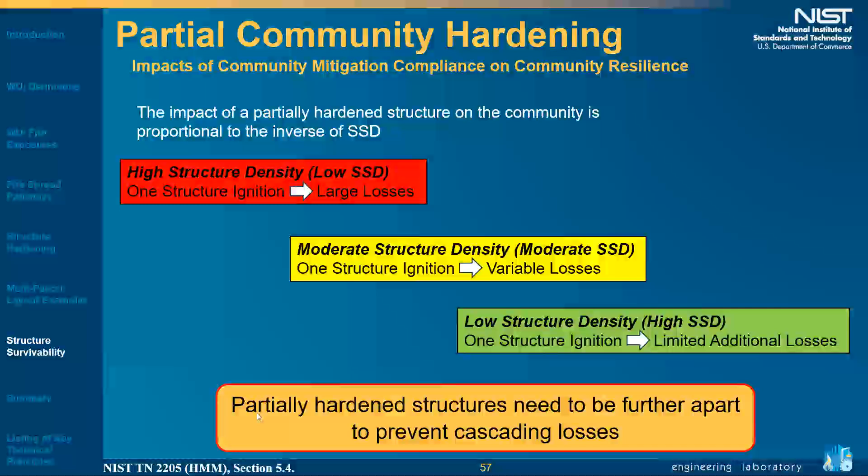For high structure density, resident participation in complete structure and parcel hardening is required. Again, we're not saying this from an AHJ perspective, but from a technical science perspective—we need to deal with these communities in an integrated way. Otherwise, an ad hoc patchwork approach will, in many cases, just waste resources.

Moderate density gives variable losses, and low density we call desired, because if you're talking about structures on two acres, there's a lot of flexibility. If some residents don't want to do hardening and are willing to risk losing their homes, the impact on that community isn't the same. So there's more flexibility as the SSD increases.

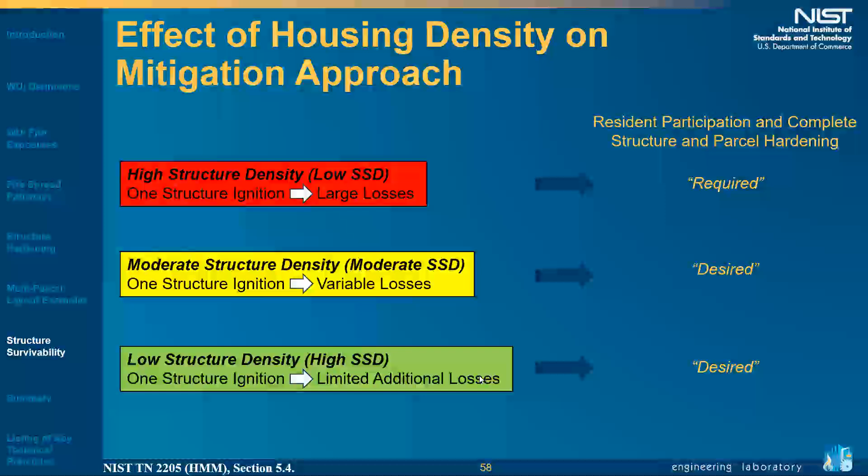Lastly, let's talk about codes. Unfortunately, there is a lot missing in the codes. I want to caution you that when we did the analysis, we were really looking for the code to have the specific hardening attribute in the exact way detailed in HMM, because the fire behavior is so nuanced and the hardening so detail specific.

So the table here should not be used to imply that when we say 'none,' the code doesn't have anything in those areas. In most cases it doesn't, but there are a few areas where the code has some partial wording, and with some tweaks could be brought up to speed to match the HMM wording.

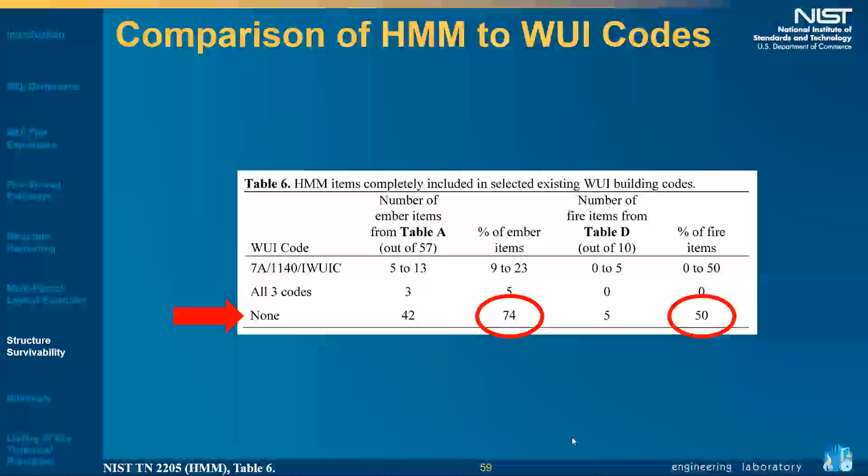But unfortunately, we think of these codes right now—and this is a generalized statement that doesn't reflect badly on any of the organizations involved. In many cases, the thought behind the codes was to make structures defensible, a conscious decision that AHJs and, at the state level, the Office of the State Fire Marshal can make. We're saying, if you want the community to stand alone, the bar now has to be way higher, and HMM gives you a path forward.

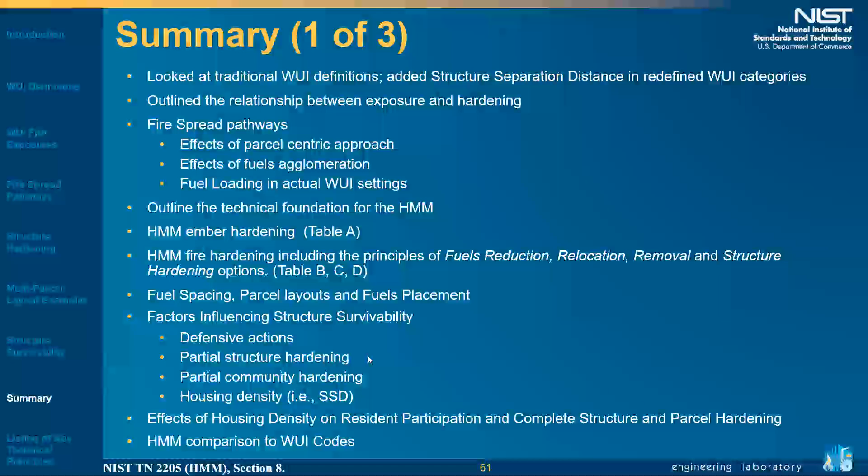So let's summarize. We looked at a lot of different parts here—I'm not going to go through all of them, just a few highlights. A parcel-centric approach has vulnerabilities for fire spread pathways; fuel agglomeration is problematic; fuel loadings can be an issue in actual WUI settings. We looked at how to implement the methodology with tables A, B, C, and D, different parcel layouts, effects of defensive actions, and partial hardening at the structure level and at the community level. HMM was developed based on literally tens of thousands of hours of work in the field.

Our four case studies to date—in order to do those, the NIST team literally spent two years in the field observing post-fire scenes and talking with hundreds and hundreds of first responders. The good news is that we have a path forward.

HMM is designed to leverage the spatial components of exposures in a cost-effective way. Dealing with existing high-density construction is a heavy lift—we acknowledge that, the bar is set very high. The good news is we have a path forward.

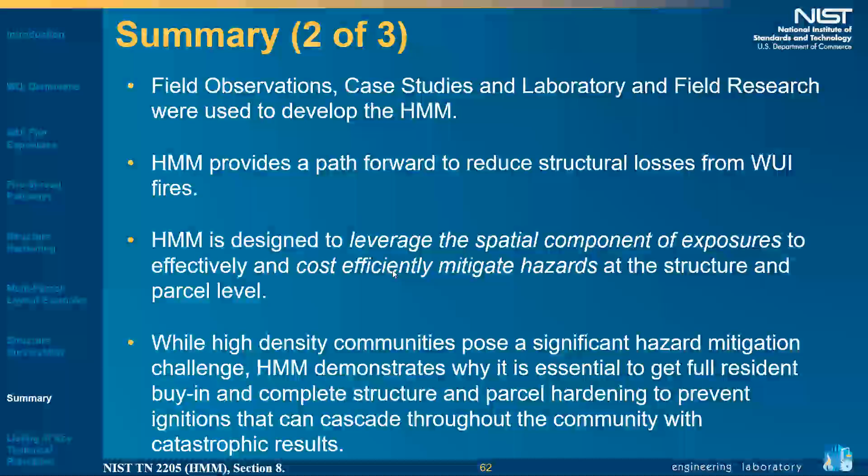Lastly, we showed why, in many cases, we don't want to be partially implementing HMM.

As I just mentioned, looking at existing codes, the information is in the report. The codes are not quite as bad as the summary table, but unfortunately, a lot is not there.

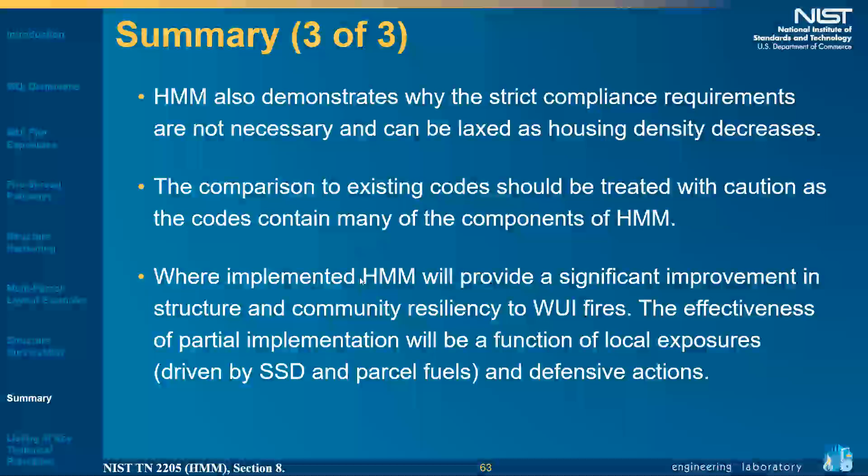So we feel strongly that where HMM is implemented, if it is implemented as it is designed, we're going to significantly reduce losses. It is a challenge for existing high density communities, but it is a path forward, so we don't have to write these things off and think that Coffey Park will happen again and again, no matter where, all around the nation.

So with that, right at 1 hour and 15 minutes, I want to thank you, and we'll take some questions.

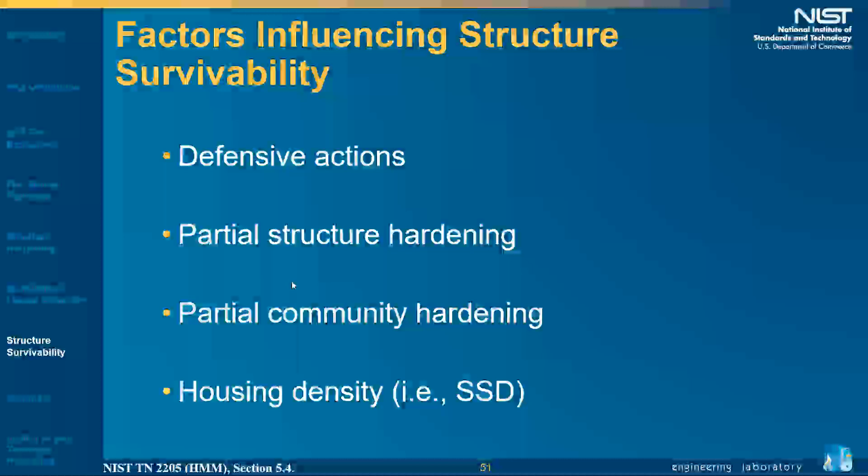Absolutely, that's the whole premise behind defensible space—you want to make it safe for them to be there so they can do the job and save the house. And that works in many smaller events where resources are available. But this approach is not going to yield the loss reduction we want in very large events with multiple tens or even 100 events going on at the same time. There just aren't enough first responders to save every structure. So we need to flip this on its head—homes need to stand alone.

Right, exactly. Okay, Eric, do you want to start the chat? Select some people, some questions? Sure.

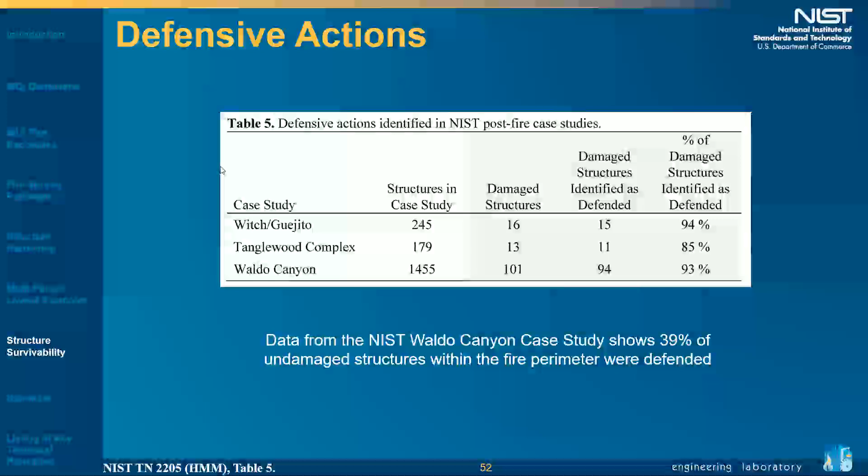Thank you. Thanks for the excellent presentation and the really great work. I was wondering if you could easily go to your slide 43, which I found particularly profound. I had a couple comments and a question.

So that's my interpretation, please correct me if I'm off there. And my question is, I understand that the purpose of this technical note is to address existing structures, but as you know, there's a big push for development, and in our community, there's a big push for dense development. And it seems to me that the implication of first pursuing the 3 Rs before hardening, and the implication of hardening against flame impingement not being recommended for the shortest distance, is that we really shouldn't put structures next to each other less than 25 feet in general as we're envisioning new development, and in particular in situations where a fire in that development would disproportionately put surrounding areas at risk due to topography or something like that. So I was wondering if you would correct my thinking where it's wrong there.

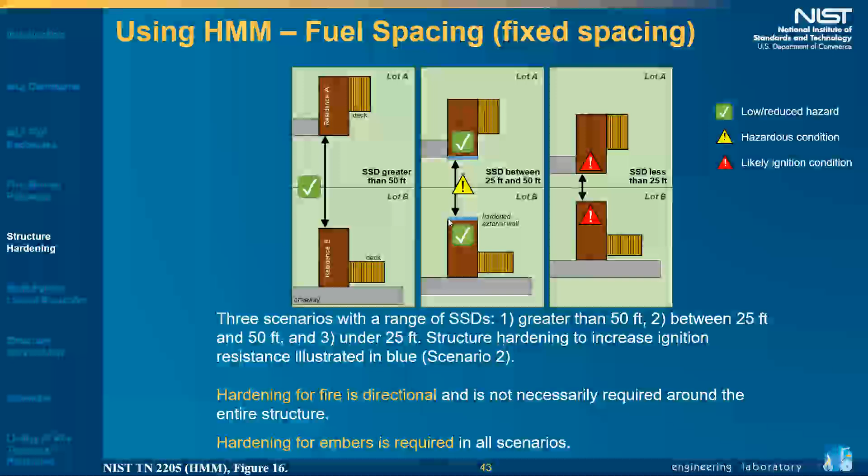So we'll keep you informed, and all the material that has been presented at the camp, the fences that's coming out, the first shed reports, and a number of other reports, including I think our wood piles report. All of that will be presented at the next WUI days. So we'll make sure that you get all the links as they come out, and continue our collaboration. And we look forward to more discussions with all of you.